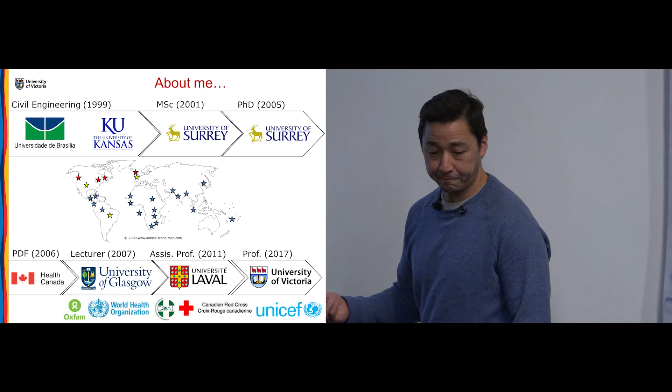And so this has led me to a lot of places, but none of this work is just myself. This is through a network of collaborators and different agencies, both academic, but also working a lot with not-for-profits, UN agencies, and humanitarian agencies.

As mentioned in the introduction, low resource settings are not limited to low and middle income countries. Inequities exist everywhere. So here in Canada, we have, embarrassingly, still a lot of those. Sometimes we're working with small municipalities on how to estimate disinfection byproducts so they can take remedial action.

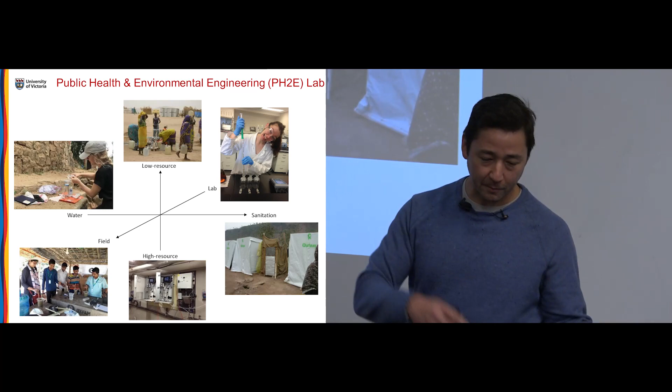Where our work is more of a continuum is identifying problems, real-world problems, testing solutions out in the lab. So here is... I need to change this picture, Camille graduated two weeks ago. And then also doing a lot of field work. So identifying problems, testing these hypotheses in the lab, going back, figuring out solutions, and testing with local partners, observing new problems, bringing them back into the lab, and so on and so forth.

So I'm going to talk about, refer to the term WASH. I think, are most people familiar with when I say WASH, what that means? Water, sanitation, hygiene, yeah. Has everyone ever seen the F diagram? Okay, so this is, in the WASH world, this is the love language of everyone who does WASH.

And the F diagram is basically the fecal-oral transmission route, which in a fancy Latin way of saying, is turd to tongue, basically. It is a sanitation talk after all.

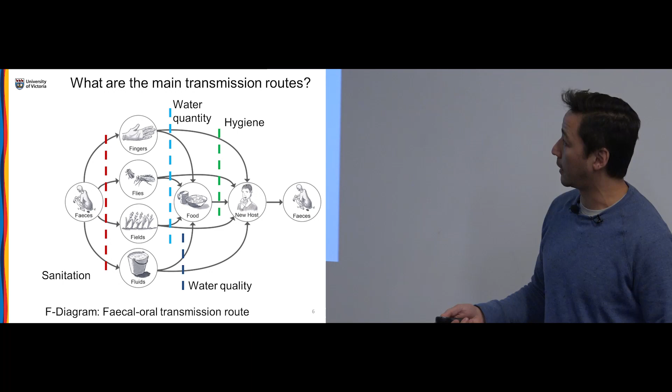But the idea here is sort of depicting different routes of transmission. So our work is focused a lot on engineering interventions to try and improve or prevent disease transmission, so health related, but acknowledging that sanitation goes beyond that, right? So sanitation is one of the barriers we could put. We have interventions in water quantity, hygiene, and also water quality. So it's just one of many approaches to do it, and that's just dealing with health. There's well-being, gender equity, a whole range of other issues that fall into WASH.

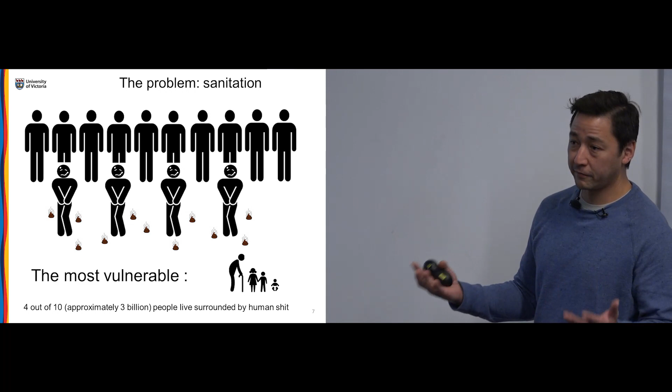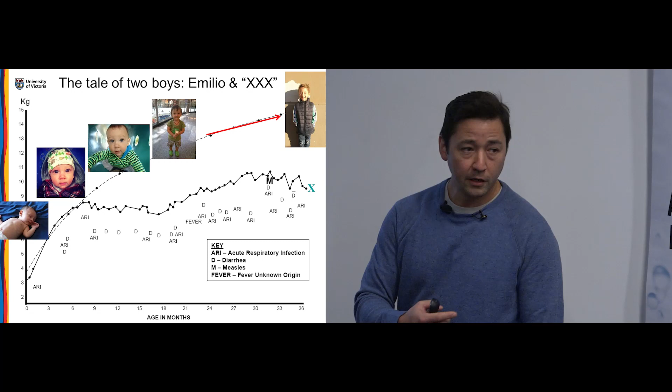So the size of the problem I'm going to talk about today is like 4 out of 10 people in the world still live surrounded by human excrement. And what that means is it's leaving a lot of the most vulnerable populations, so children and elderly, to the risk of these diarrheal diseases. And to illustrate the impact, especially on children, that's why, for example, UNICEF is the UN agency that's custodian of most WASH activities, because children are the most impacted.

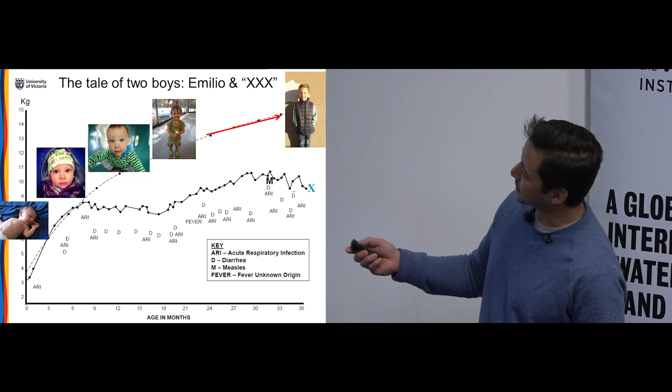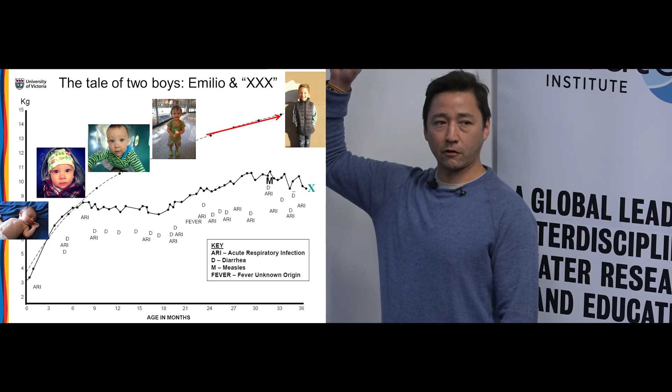So this is 2 growth curves. On the top is the growth curve of my son, who doesn't know I'm using his photos, but he's still under 18, so I can do that. So Emilio is following the growth curve, and anyone with small kids or who's been around small kids knows or will learn that kids come in different sizes, and as long as they stay on the growth curve, that means they're off to a healthy trajectory.

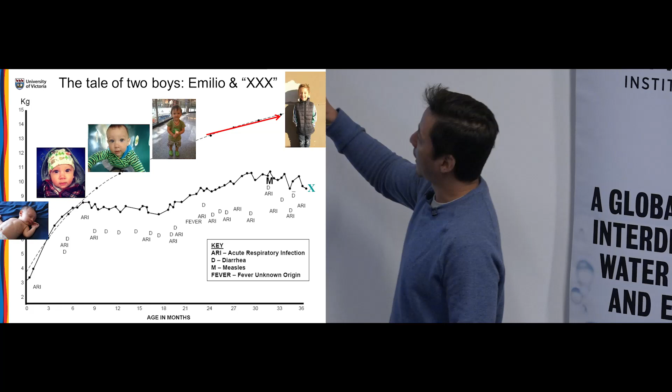And so this is data from the 1960s, I think it was from Guatemala. And on the bottom is a growth curve of a child who does not have the same privileges as Emilio. So what you see is every dot here is a visit to a clinic where they weigh the child. And under the visit, there's either a D, which is marking a diarrheal episode, or ARI, acute respiratory infection. So if we remember anything from

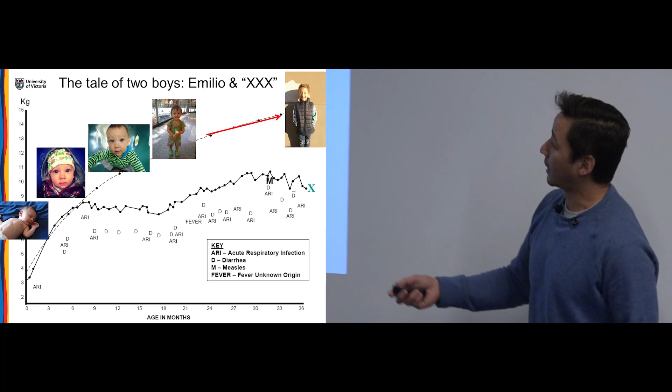COVID, it's washing your hands. So again, water related, or fever or some sort of infection. And as you can see, the point is when you fall off the growth curve and you stay off, this is when you start having long-term effects of these issues.

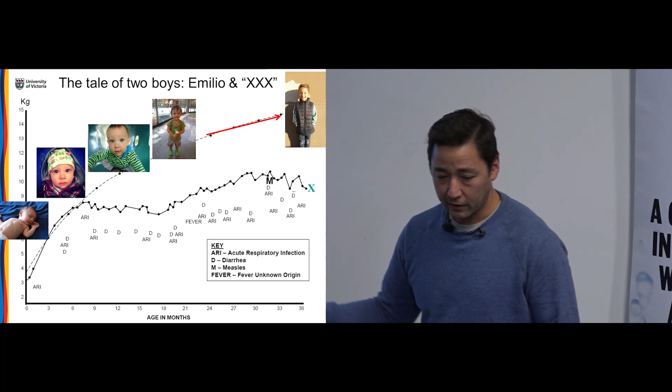So just to illustrate the importance of WASH, now things are going to get a little bit more graphic and show you what inadequate sanitation is. So we can all use our imaginations, but I feel this is one of the photos that I still use, and it's from one of my first field assignments.

So we're looking at an internally displaced persons camp after the 2005 earthquake in Pakistan. So people lost their houses, and are living in camps. And I can't remember the backstory, but you see that one latrine is very different from the others. Now let's take a look inside, shall we?

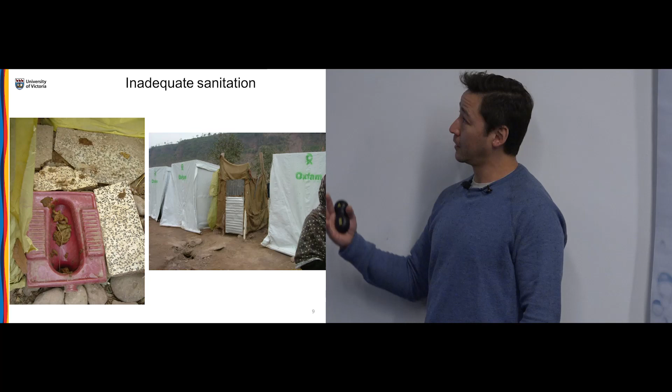Disclaimer, these will be a little graphic. But we are here to talk about inadequate sanitation. So this is what the conditions can be when we talk about inadequate sanitation. And that's when you have a toilet. But most likely this toilet won't get used for very long, and we'll start to see the effects of not having proper facilities or services. So from here, we did an inspection around, and what we started to see is what open defecation is.

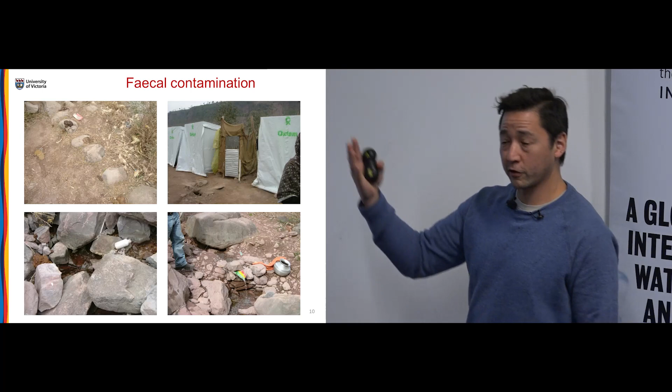So when there's no sanitation facilities, we have daily needs, and people will find places to go, probably in the surroundings of this camp. This exposes people to disease, but women might also be attacked when trying to find a place to relieve themselves. There is no privacy or dignity.

Bringing this back to the health perspective, what we saw doing this inspection around the camp is that if you're going to relieve yourself, it's very convenient to do it near a source of water. So this was the case here. And following this source of water a little bit down, that was the same source of water used for the camp. So that's the F diagram in real life.

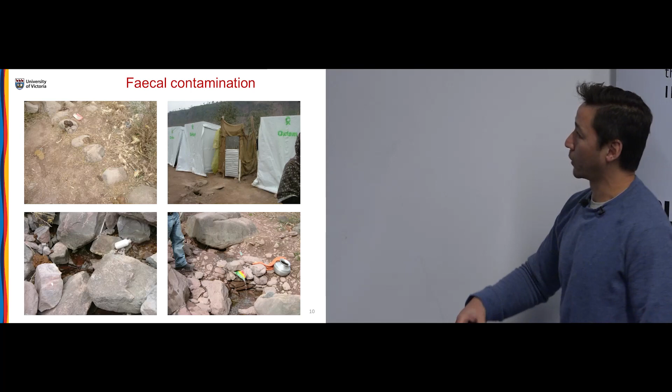And these examples are pervasive. We can talk about different conditions, and this is in a rural context. So when we go into, for example, a more urban context, has anyone heard of flying toilets here?

No? So flying toilets are not these, but there are some amusing musical videos people have done about flying toilets that you can Google.

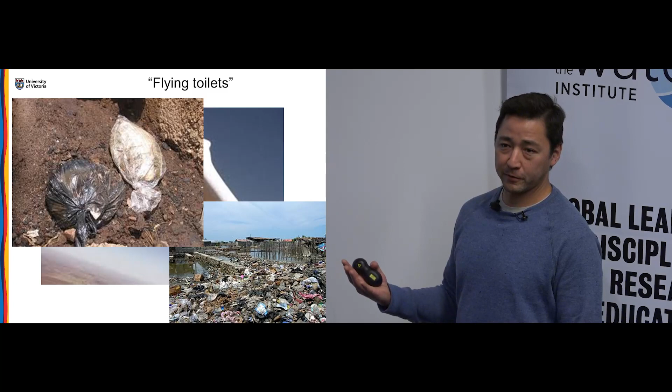But they're actually these. When you have to seek privacy, sometimes this is done in the privacy of people's homes. A plastic bag is used. You relieve yourself in the bag and fling it as far away from your home as you can. I think the Kibera slum in Nairobi is the most notorious for this, that's where the term flying toilets was coined. And there are certain times of the day when you just know the flying toilets are going to fly, so you stay indoors then.

But as you can imagine, there's an accumulation of this waste and conditions that leave it more amenable to the propagation of disease, et cetera.

So bringing us to SDGs, our SDG target 6.2 is what I want to talk about today: essentially universal and equitable access to safely managed sanitation services, with special attention to the needs of women and girls.

So when I say safely managed, I'll talk a bit more from the perspective of environmental health, of pollutants and contaminants, but safely also means privacy, safe access, and lighting at night, preferably within a household. That's the metric the joint monitoring program of UNICEF and WHO use to monitor progress towards these goals.

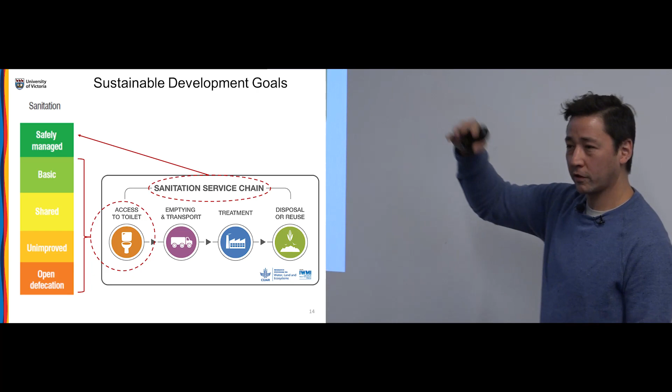Previously, in the MDG era, we looked at just access to toilets. And depending on the type of toilet, or the lack thereof if you were unfortunate enough not to have one, it's classified as open defecation, unimproved, shared, and basic. Now, to be considered safely managed, we want all those elements of the service chain.

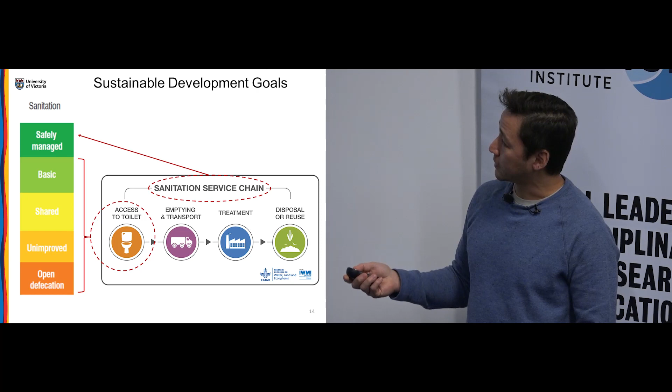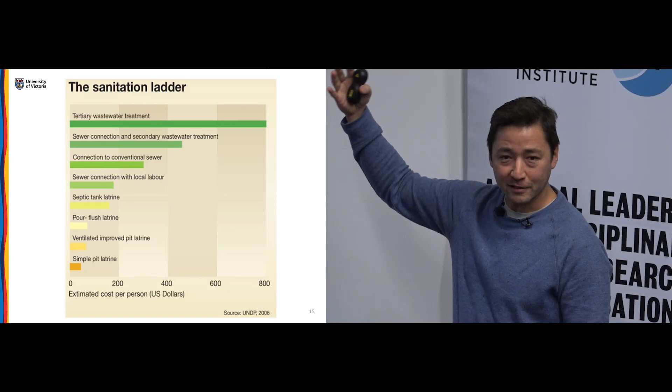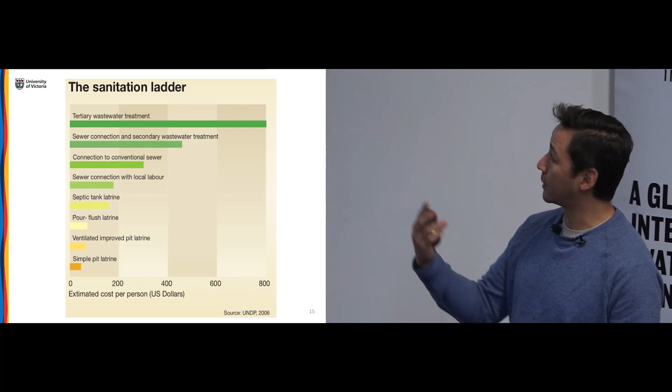There's what's called a sanitation ladder, and I'm not sure this is the best way forward, but there's this idea that a simple pit latrine might be something we start with and slowly work our way up to what we consider the gold standard: tertiary water and wastewater treatment. We can discuss whether that's the right approach, given all the different contaminants we're finding and scarcity of resources.

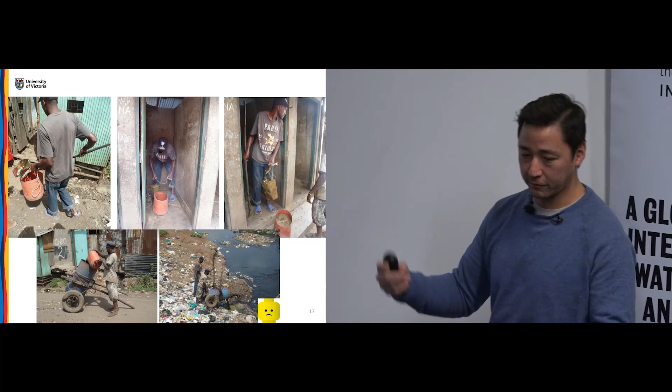So the estimate is that here is about 1 cubic meter of sludge. That's equivalent to 1,000 people having open defecation, right? Just in terms of some simple estimates we can do in terms of the organic loading of that. So that's not what we want.

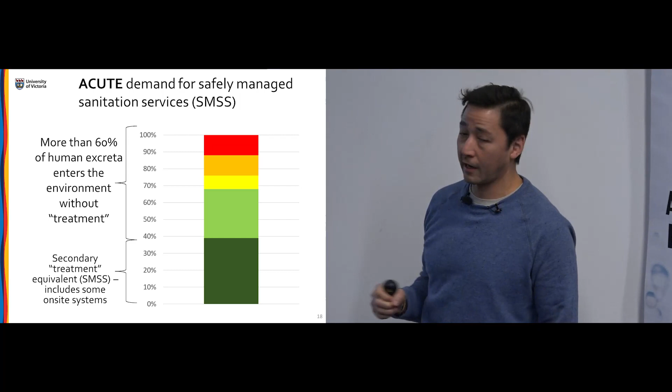And globally, this is our current situation. So 60% of our wastewater produced is not treated, goes into the environment untreated, and we can still question whether that 40% is adequately treated. In these estimates, on-site sanitation, things like septic tanks, enter into this estimate of the 40% that are treated.

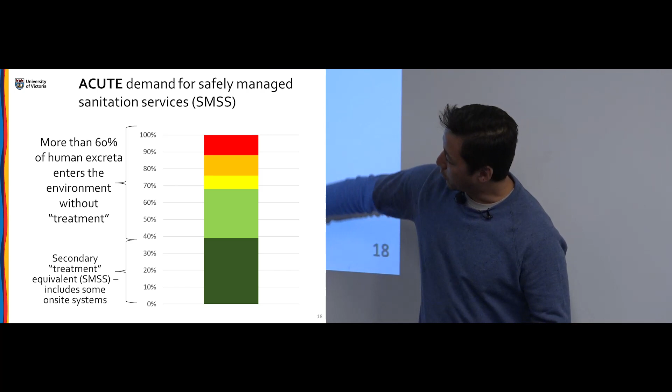So to me, treatment, and this is what a lot of these estimates use, is if you are connected to a centralized facility that does at least secondary treatment, that's the definition of treatment. And if you put on-site systems into this, we need to question whether on-site systems can actually deliver this treatment, or what, right?

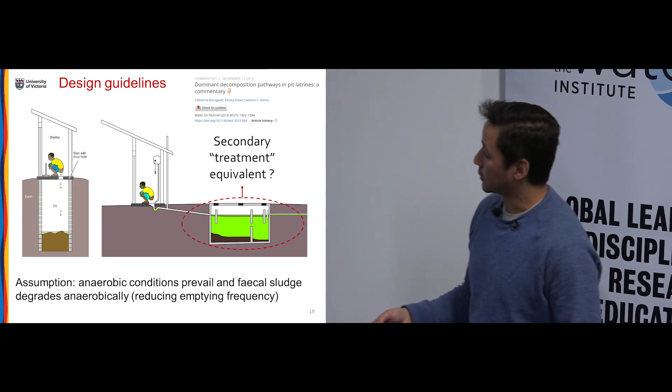And that's sort of what our research focus is on. So this all started with us looking back at design criteria for these systems, and there's one key assumption. Most of these design guidelines that date more than 70 years assume that there's going to be anaerobic conditions in these pits or in the septic tank, and those anaerobic conditions are going to degrade the fecal sludge, thereby lessening the frequency of the emptying that's needed.

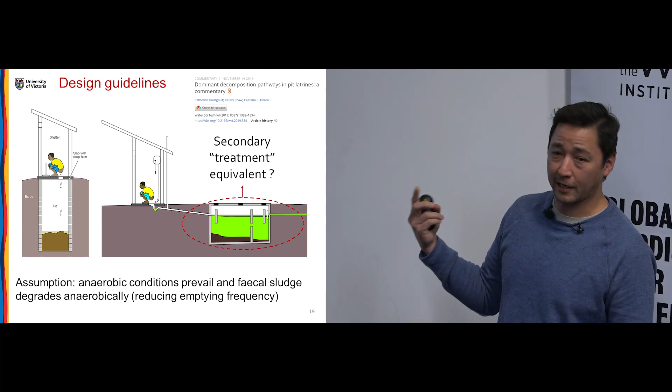And I'm going to focus more on secondary treatment and whether that is actually, can we consider that equivalent to... I'm going to focus on septic tanks and ask the question, can we equate that to secondary treatment? Or are we overestimating actually how much of the global wastewater is actually treated?

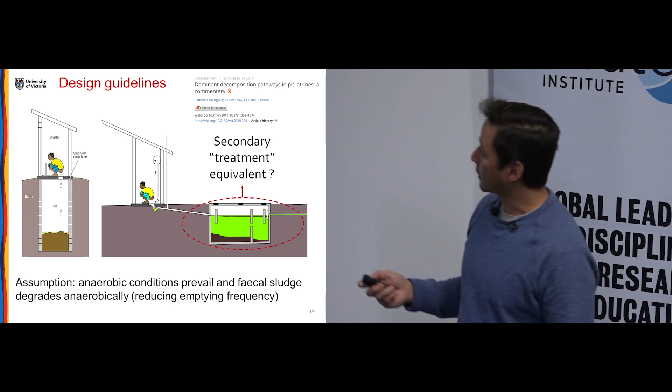So as you can see, we're very skeptic about septic tanks, and this led us to produce our first commentary. So Kelsey, who is an ex-Waterloo student, so thank you very much, she's doing her PhD now, and we had a poster in a previous conference, and I'll present a little bit about the work we've been doing.

And the idea was to start questioning these highly used systems - more than 50%, about 50% of the world population uses on-site systems, and septic tanks are one of the most common ones. So these are highly used and under-researched, right? So we wanted to look at what's the evidence, if there is any treatment going on, what type, how much can we rely on it?

And the idea was not to say, hey, we can't use septic tanks anymore. No, these are very useful, but I think as engineers, as policymakers, the problem isn't to use a technology that has limitations. The problem is to not know the limitations of the technology we want to use. So that's a bit of the approach we have to this research.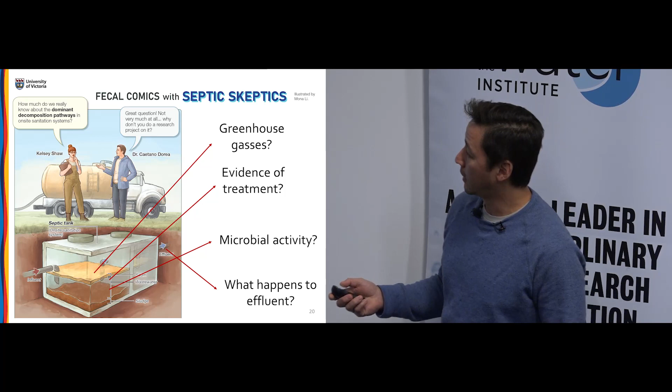We want to find out what's happening to the effluent. So this is ongoing work that's happening. This led us to try and estimate, well, what are the greenhouse gas emissions of these? So are there any implications there? And more importantly, can we detect the relevant microbial activity?

So wastewater engineering has largely been designed in a black box approach. We assume things happen, we monitor certain parameters, but we don't fundamentally understand the microbiology of these systems. So we wanted to shed a bit more light into this, and that's what Kelsey's doing now in her PhD.

So this was the previous work that happened. We intended to do the microbiology work first, and then, I don't know if everyone remembers, in 2020 there was a thing called the pandemic.

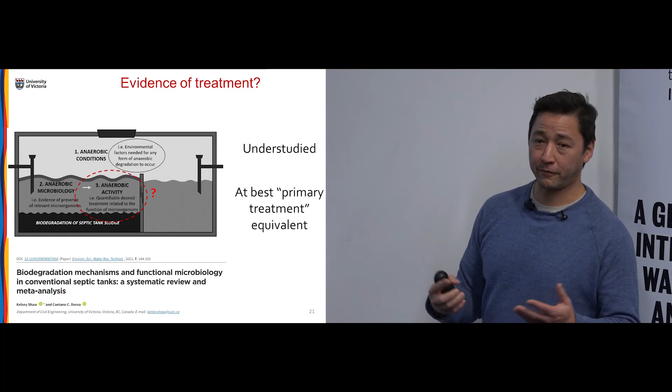So we reverted back to desk studies, and we did a systematic review of all the literature that had been published on these systems to find what we can say about how they work. The framework we developed was: first, do we have evidence of anaerobic conditions? If that's the assumption, at least the environmental conditions need to be there for that.

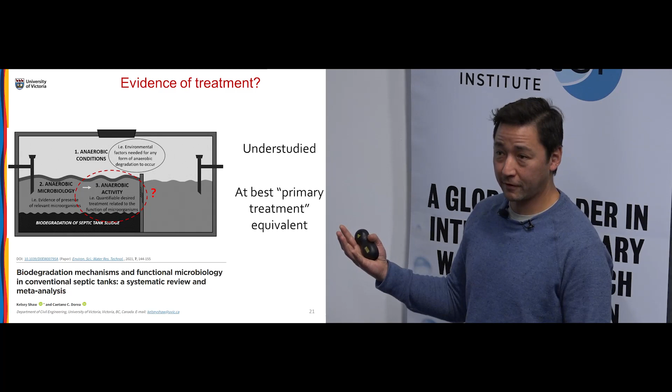Is the relevant anaerobic microbiology there? Do the microorganisms we assume are going to do this treatment even present? And if they're present, we want to be able to say, are they active? So one thing is to detect presence, another thing is to detect activity.

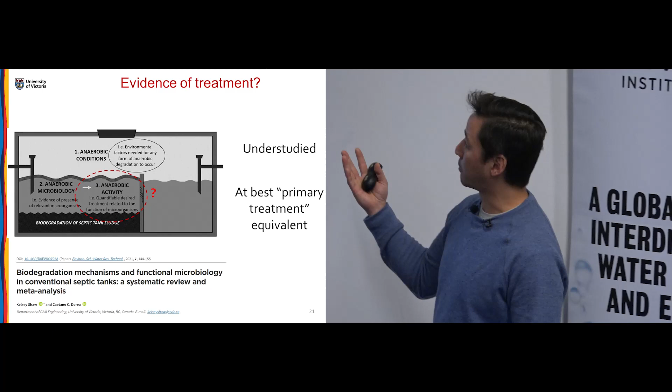So we scoured the literature, and our conclusions are that these are poorly understood systems, and at best we can count on them for primary treatment. This is essentially a settling tank, and all our dissolved organics, nutrients, and the rest are going to go into the environment. That's the second bit we're working on now: trying to figure out what happens, what's the fate of these, and can these be engineered in a way to produce better treatment.

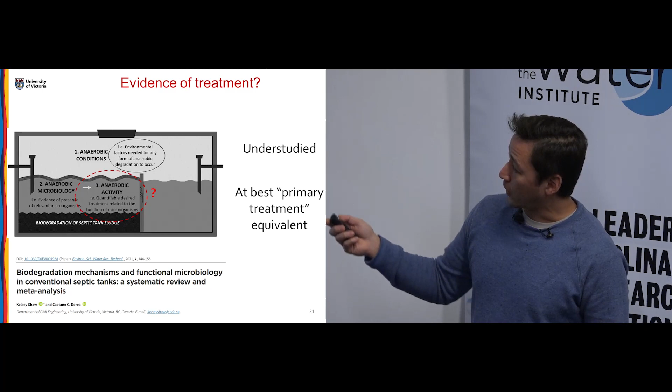And a key question we couldn't answer with this was, did we find evidence of anaerobic activity? That's where we did lab work, some preliminary lab work to confirm this.

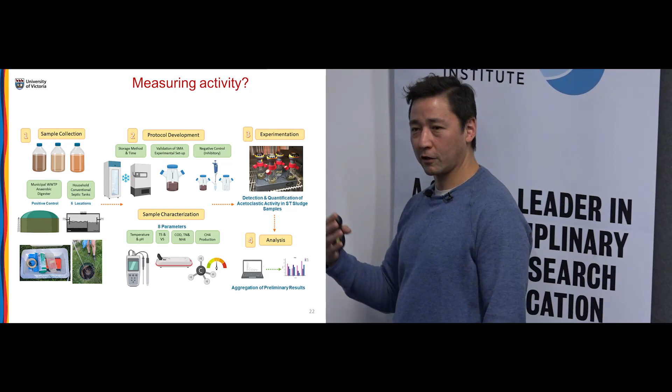So we sampled different sludges. We sampled anaerobic reactors—engineered reactors from municipal treatment plants—and used that as a positive control. Developing this protocol, we did what's known as a SMA test, called a specific methanogenic activity test. The idea is we use our sludge as our inoculum.

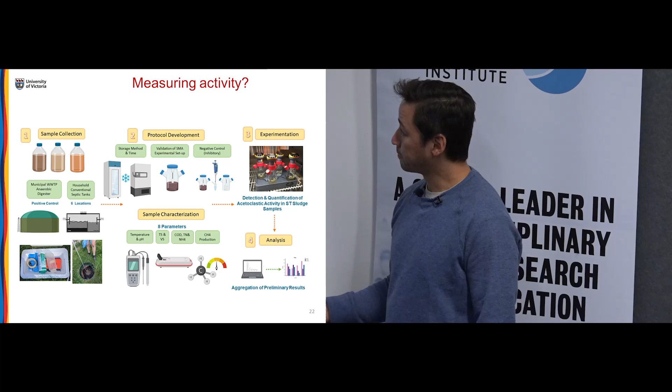We feed it different substrates, and we try to find the response to these substrates. If we find a positive response, in this case through gas production, then we know that's evidence of some activity happening. So just to give a glimpse of some results, we did these with two types of samples.

One was with fecal sludge from septic tanks, and we also collected fresh feces. We wanted to know the inputs to the system and also what happens to the sludge once it's been sitting there for a while. And we got two different responses.

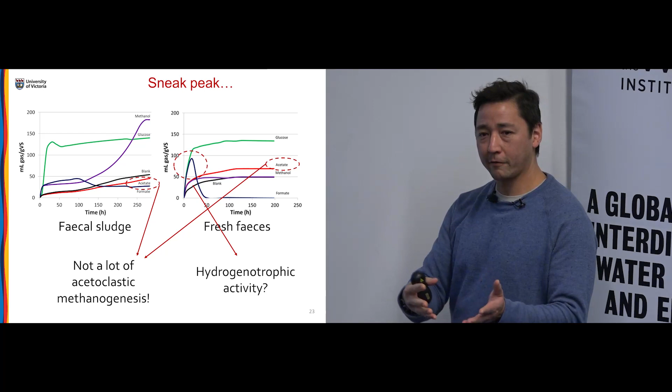However, I think the main finding here is when we fed it acetate—and that's the basic assumption of anaerobic degradation, usually implied that we have what's known as acetoclastic methanogenesis—we saw that the acetate, compared to our blank, the black line, never gave statistically significant differences. So we're not seeing evidence of acetoclastic methanogenesis.

One thing that intrigued us—though I think something happened in this test—is we were getting a lot of formation, when we added formate, of hydrogenotrophic activity. Now, why hydrogenotrophic? Anyone heard of hydrogenotrophic methanogenesis? Well, sitting here in this room, everyone has these organisms in your intestinal gut, and that's the reason why.

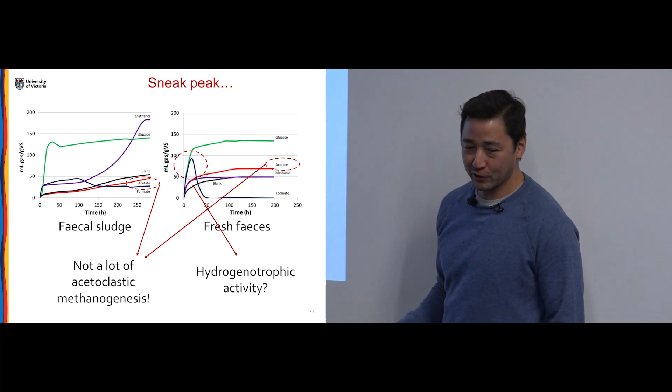So a lot of this research—I'm going to go on a tangent here—happened during the space race. We were sending astronauts into space, and they were going to be confined in these capsules for weeks on end. As human beings, they were going to flatulate, and NASA researchers were interested in whether that would not kill them. Luckily it won't, because we produce a lot of hydrogen, but in our guts we have methanogens that can use that hydrogen to produce methane, which doesn't kill us like hydrogen would. So that's a contribution of the space race to sanitation, I guess.

But this sort of flipped on its head a lot of the assumptions we were having. So now we're seeing evidence that the activity assumed in these design guidelines is actually not happening.

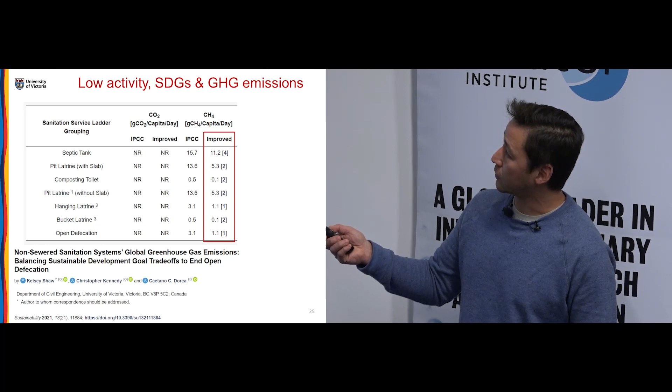This led us to link that reduced activity, the sustainable development goals, and greenhouse gas emissions. We wanted to weigh these two SDGs of achieving safely managed sanitation services with climate action—if we're going to invest in it, would there be an environmental cost, and what would that be? What we're seeing is that this assumption that these treatment systems can degrade waste anaerobically has led to IPCC emission factors we believe are overestimated.

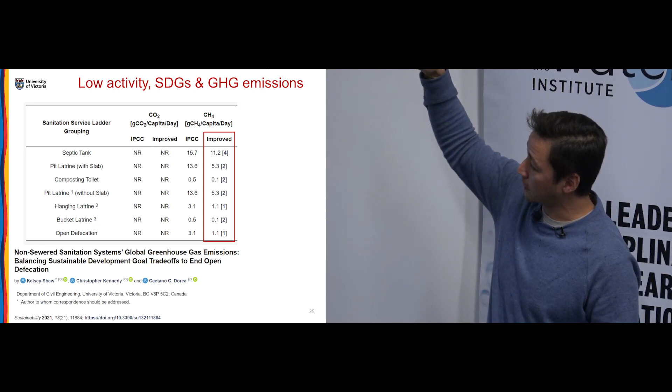So looking at literature and field-derived greenhouse gas emissions from these systems, we've seen that—well, we proposed an improved emission factor for these different types of sanitation facilities, and we did some modeling.

So the modeling consisted of modeling the greenhouse gas emissions using both the IPCC and the improved factors, and we had 3 scenarios. One in which open defecation is not solved, so we have our current rates of open defecation. A second scenario, our second best, which is continuing our current trend of sanitation delivery, which will not fulfill the SDGs.

We're not on track, but with the improvement of at least open defecation. And the third scenario, which was our aspirational one, is if we achieve SDGs, what would they look like?

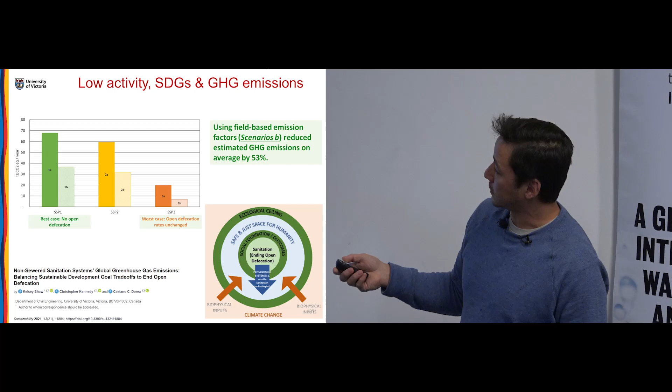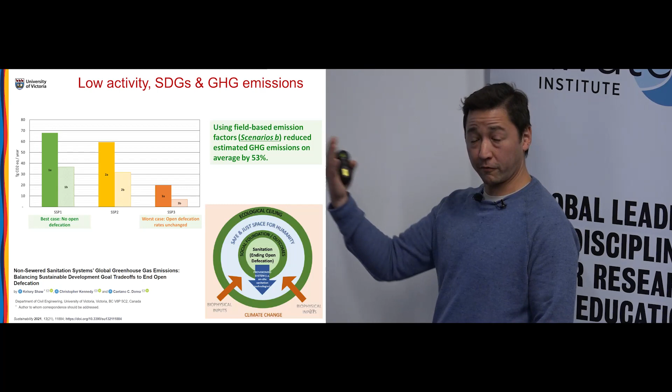And so what we see is that those emission factors, so the B letters are estimates using the improved factors, actually the emission factors are at least half of what could be generated by the IPCC emission factors, and that we have different levels of greenhouse gas emissions.

Now, to put this into perspective, this is a very small anthropogenic contribution to the total. Also, importantly, the idea was not to say well, we can't do this because there are greenhouse gases. Sanitation is a basic human right. And so in order to move, in this idea of ending open defecation, there is an environmental justice component there that justifies why we would have to live with these factors. And notably, if we calculate, there's a lot of research on emission factors from conventional wastewater treatment, and they're much higher than this, and we don't question that approach either.

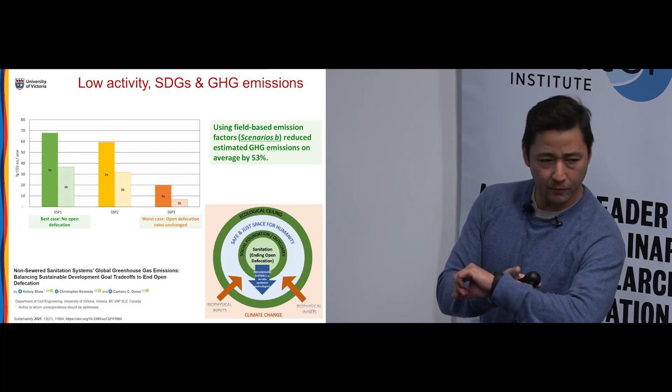How am I doing for time? We have 30 minutes? Yeah, 10, 15? Yeah, I should be, I think, wrapping up in a few.

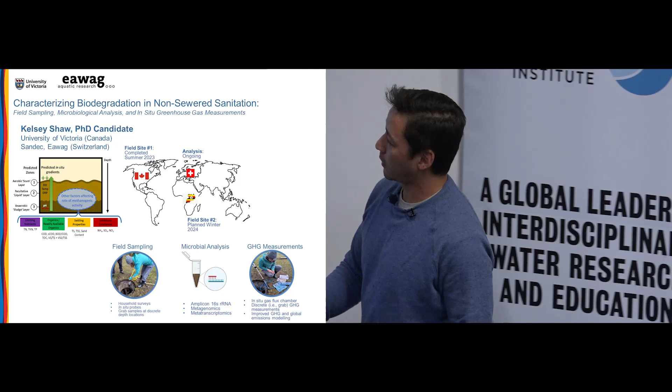So where this work is going now is we want to take this more global and take it to the field. This was largely impacted by COVID, but now we're doing more sampling sites. So Kelsey, we've partnered with Sandec at EAWAG, and we're working with Linda Strande and her group, and Kelsey is looking at different...

We're trying to measure the gradient, so we're doing a more detailed resolution of sampling within the pits, looking at both physical chemical characteristics as well as microbial analysis, and conducting household surveys to understand whether the behavior of the household influences the performance of the pit.

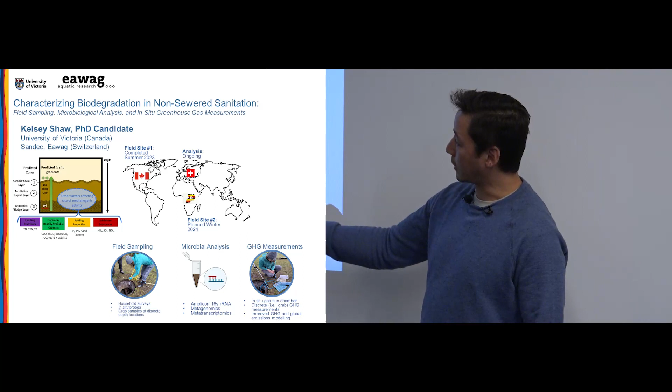For the microbial analysis, we're trying to dig a bit deeper into the method, using methods like metagenomics and metatranscriptomics, and running reactor tests to see if we can measure the activity. And finally, we're doing more of this field-derived greenhouse gas emissions work.

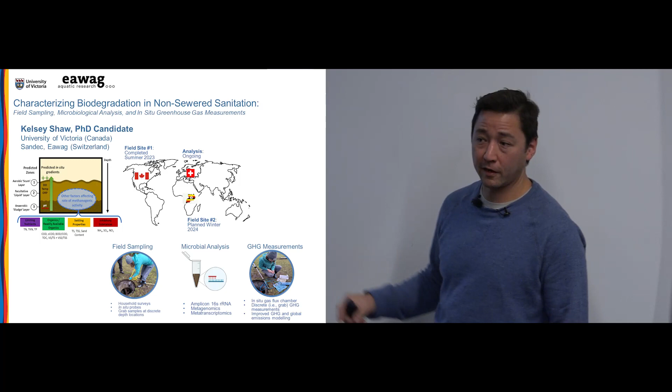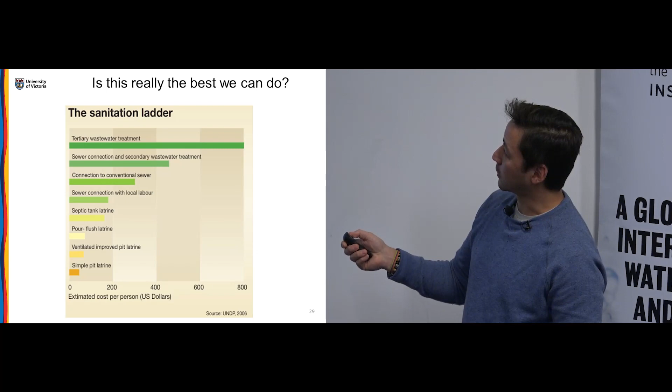To fuel some discussion and look ahead at what's in the crystal ball, I don't think we will meet these targets. Our trajectories are already set. 2030 is less than 10 years away, so we need to start thinking about what comes next. This is an opportunity to question whether this is the gold standard we should be aiming for, and I think there's a lot of questioning we can do.

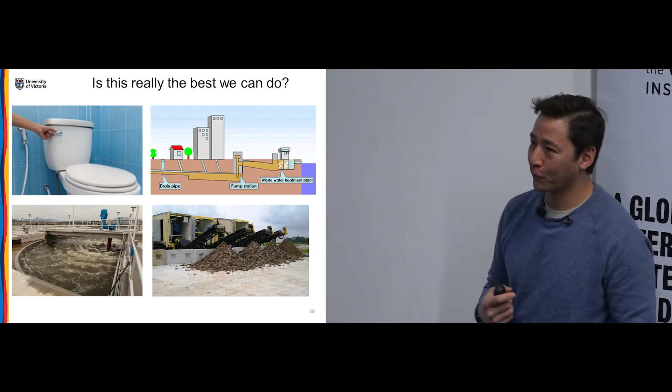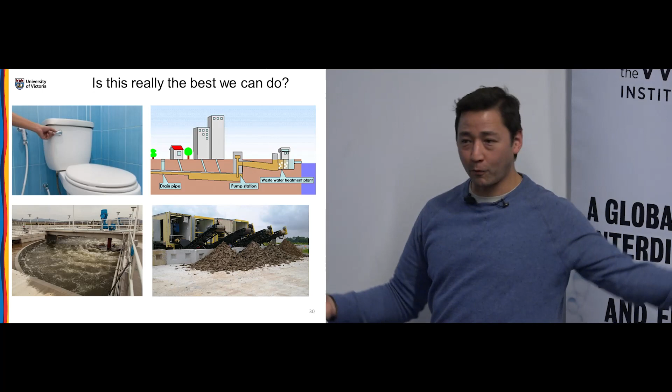This doesn't get a lot of traction in Canada, like when we talk about how we approach our current situation. One of our students coined this term, the porcelain dream, meaning we can use our flush toilets and forget about it. But essentially we put in a lot of time and energy, so there's an environmental cost to treat this waste, using drinking water, by the way, that we already put a lot of time and energy to treat in the first place. I think we consume, what, 2 liters per day?

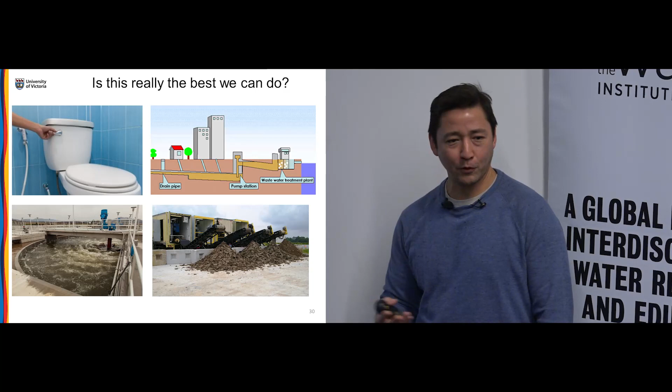And what's the consumption here, Monica, for? 1.6. But the delivery is what, 200 liters per capita? Oh, you mean drinking water? You mean how much we produce in the region? Yeah, but I guess the figure in what, consumption? Yeah, and it's 200 liters per capita. So we use about 1% to drink, and we flush and do other stuff without that.

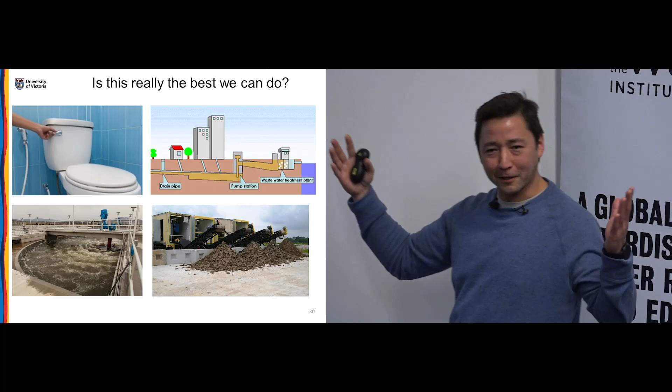So it's, but I find in Canada with the Great Lakes, it's always hard to make that argument, right? Is this water-intense system really justifiable?

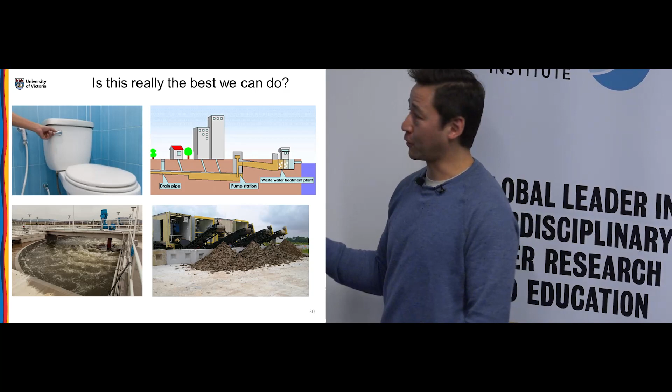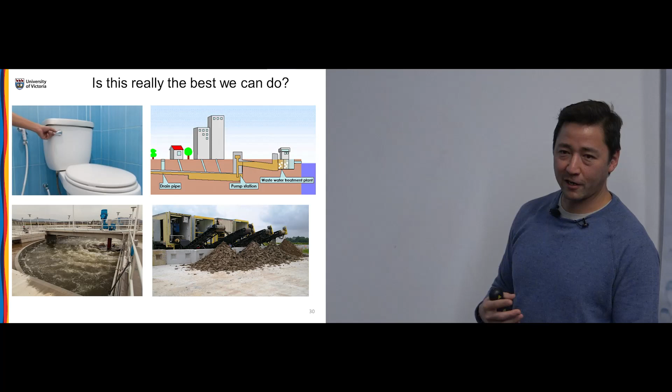But we're still left with an end product, and if anyone's familiar with Victoria now, biosolids is a huge, huge issue. Victoria just got our first treatment plant commissioned two years ago. Before that, we were essentially dumping everything into the Salish Sea. And unfortunately, it's a missed opportunity, because we were delivered a state-of-the-art 1970s treatment plant, which I was very disappointed with.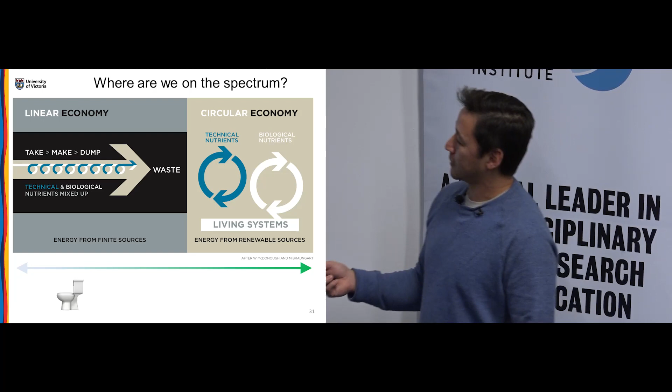Our systems are still linear, right? We aren't thinking about, we're starting to think about reusing some of these resources, such as the energy that's embedded in it, water, nutrients, et cetera. But I think we're still a bit away from that, even in the conventional treatment systems. And we're not even thinking about that yet for these on-site systems. So there's thinking to be done there, right?

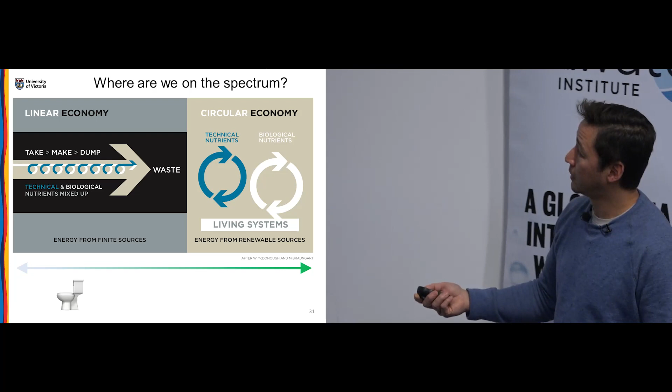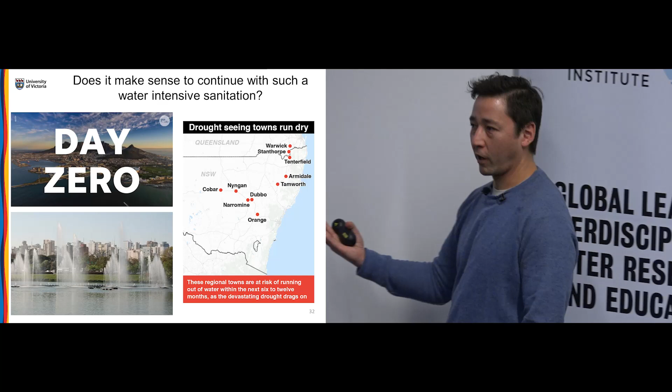When we start having water crises, like we saw in Cape Town, a lot of the stuff that was reported in the media was it was a water crisis, but when you speak to people on the ground, that was actually a sanitation crisis. There was no water to flush toilets.

The same thing happened years later in Sao Paulo, Australia, and we could cite several other examples. So does it make sense to continue with these water-intensive systems for sanitation? The reality is that these systems probably won't work in a lot of low and middle income countries.

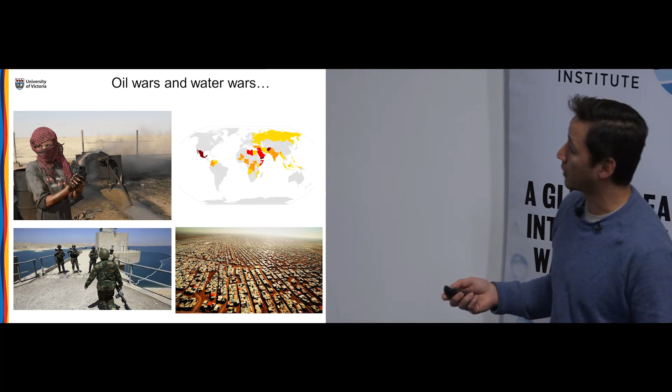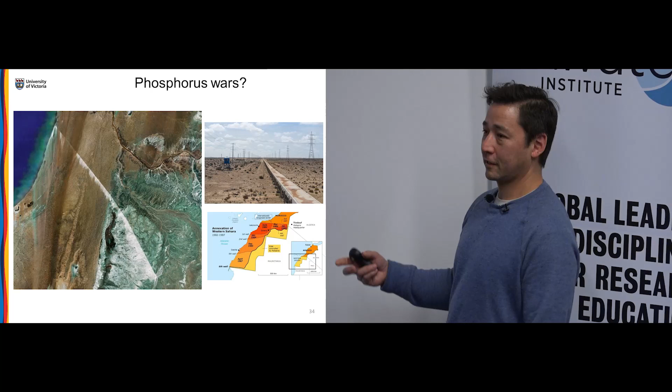In terms of resources, we've heard about oil wars, water wars, but we need to start thinking about phosphorus wars. Has anyone seen this image on the left? That's the largest conveyor belt in the world, going through Western Sahara, which is a conflict zone. Morocco has taken a lot of this, and these are one of the few phosphorus reserves on Earth.

So if we can recover some of these nutrients from sanitation, think about every time you flush, you're contributing to world peace, right?

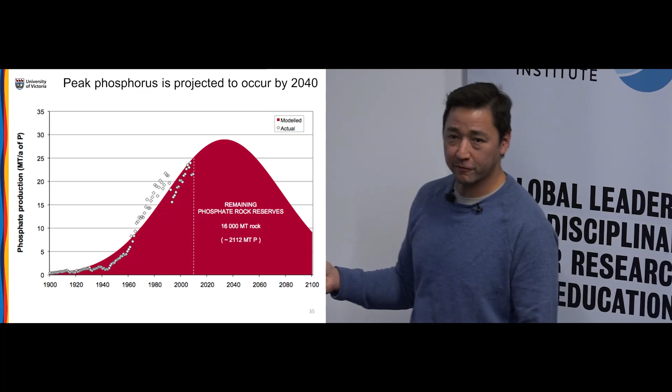This is some estimates of peak phosphorus, around the year 2040. So these are intrinsically linked to food systems.

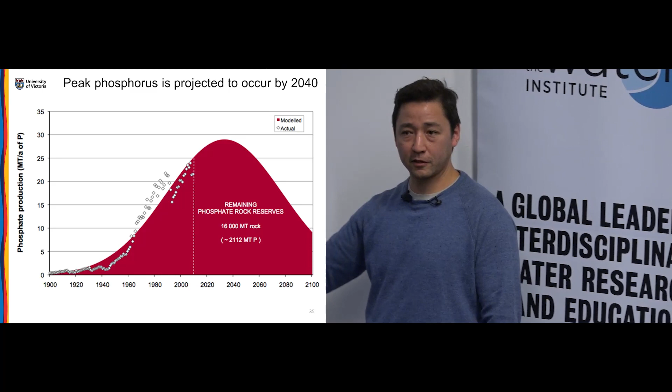And so if we don't change how we approach sanitation, and here we have 60% of the world without adequate treatment, this is the opportunity to rethink how we're going to provide treatment in face of the current crisis and dwindling resources of our lifestyles.

The world is also changing. So if we look at the cities where there's a lack of these sanitation services, a lot are in low and middle income countries, and the projection is that those are the next mega cities of the end of the century. So it's a changing world, a changing demographic, and that's part of what we need to think about when designing new systems.

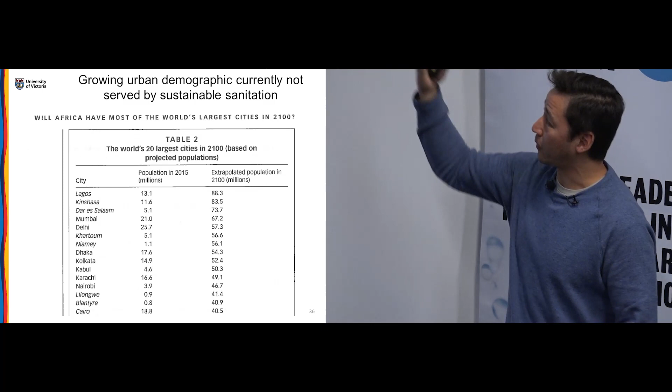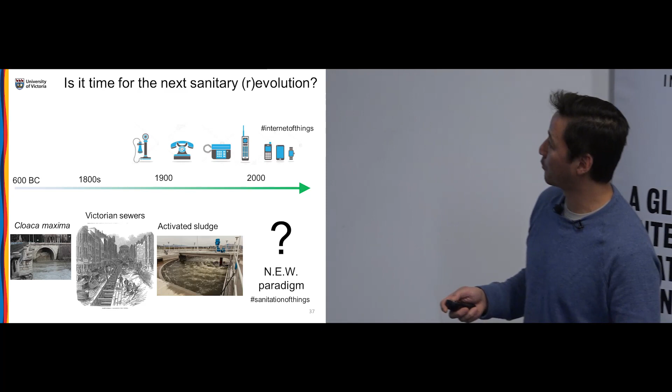And I know we can do it. If we look at cell phones, how much they've evolved, why can't sanitation have that sort of evolution? Apple's going to start selling toilets, maybe. But it's an exciting time in sanitation.

So there's a lot of new technologies, things like biochar, composting, black soldier flies. These are larvae that can consume directly fecal sludge and transform them into a source of protein. So we can start to look at other streams to generate revenue and recover some of these resources.

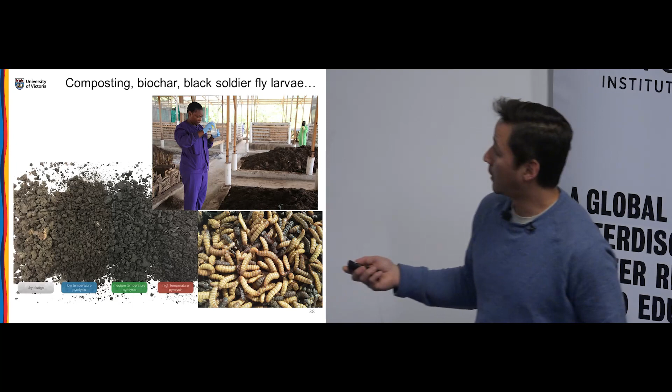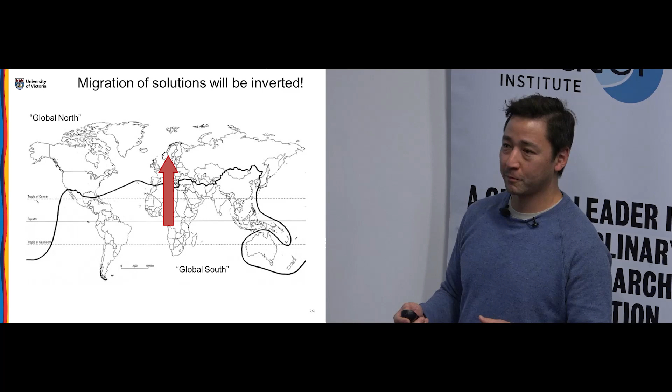A lot of this research is happening in the countries that don't have access to safely managed sanitation services, and I think that's a super exciting time. What I hope to see in the future is, we always talk about a north-south migration of ideas, but I think the future of sanitation is going to be different, right? I always say, if we can solve sanitation issues in Kampala, there's not a city in the world we can't tackle. So that's an exciting time to be around the creative ideas and how people are tackling this.

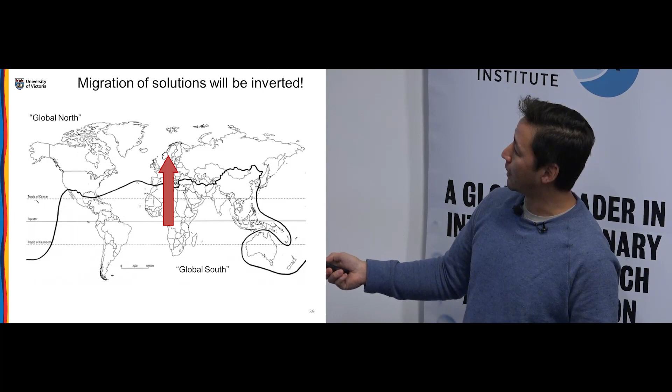So you can deliver a project under budget, on time, fit for purpose. That's not a wash engineer, that's actually a perfect engineer, right? So with that, I'll finish here, and thank you for your attention.